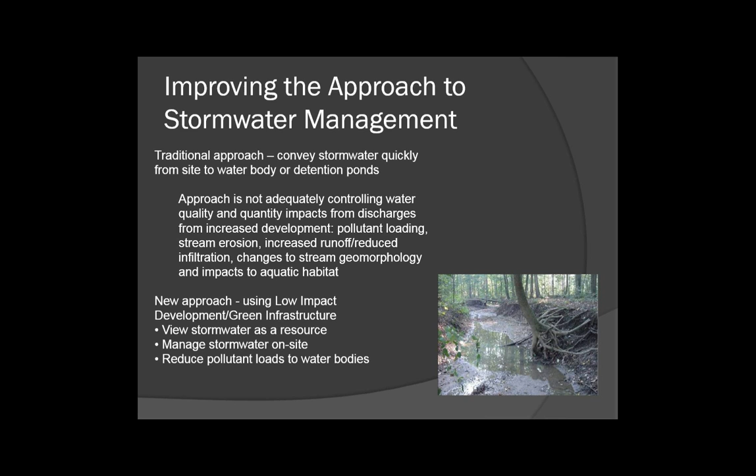It can change the geomorphology of a stream. It affects the habitat for fish and wildlife. Using low-impact development or green infrastructure is changing the paradigm. It's viewing stormwater as a resource, managing stormwater on site to the extent that it's practical, and reducing pollutant loads to water bodies.

Low-impact development is a comprehensive land planning approach, and it's trying to basically look at the pre-development hydrologic regime and mimic that. And in doing that, it can sustain and restore ecological functions. And it can be applied to new development, redevelopment, or retrofits. It's typically less expensive and easier to do if you do it up front more holistically rather than doing a retrofit later.

The picture that you see on this particular slide is actually Northfield Stapleton in Denver. Stapleton is the old airport. I actually live there. This is a particular area that is used as a regional stormwater facility right off of Interstate 70. In addition to capturing stormwater for a very large shopping center that has a Super Target and a Bass Pro Shop and a number of other things, it also serves as wildlife habitat and a great open area.

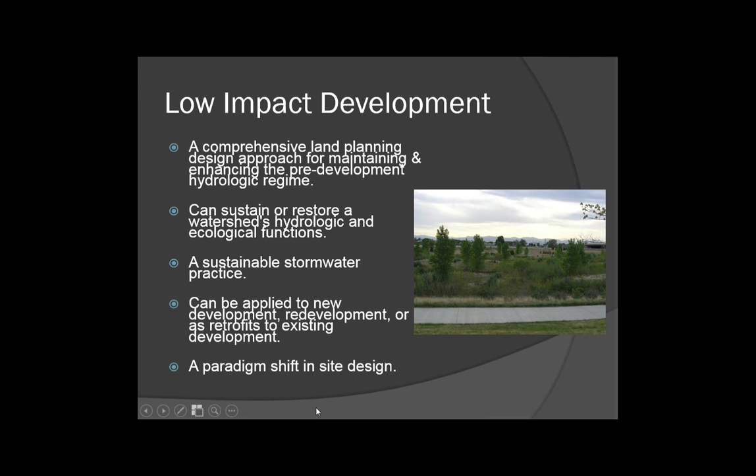Green infrastructure can be done in a lot of different scales. In large scales, it can be forests, and it's very important to protect those for drinking water supplies in headwaters areas. It can be in rural areas in terms of riparian areas or wetlands, and then it can be ultra-urban areas where you're doing green streets, planter boxes, and other things.

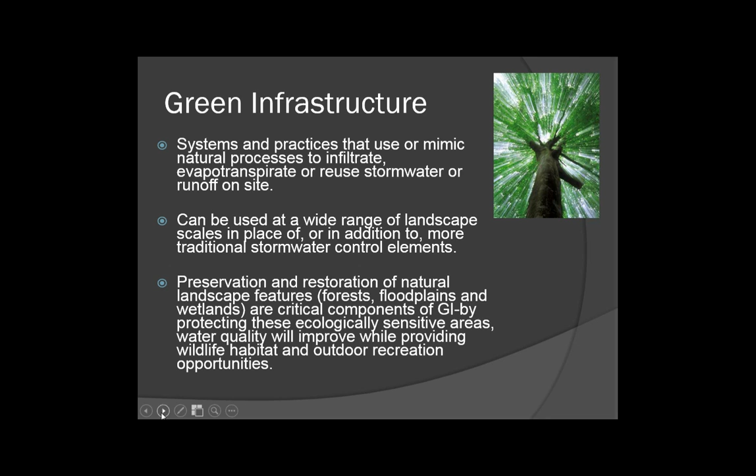But it's very important in terms of protecting water quality, protecting ecologically sensitive areas, and providing opportunities for people to recreate and enjoy the outdoors. Basically, we're trying to take the water and slow it down, spread it out, and soak it in.

Green infrastructure can be integrated into parks and open space and urban forestry, and a lot of parking lot requirements. Typically, a lot of communities have parking lot landscaping requirements, so it can be integrated in that way. It's a great climate adaptation strategy. It's great for smart growth, sustainability, resilience, sort of depending on what words you want to use to characterize that. It's also great for flood restoration, which we've seen a lot of in Colorado.

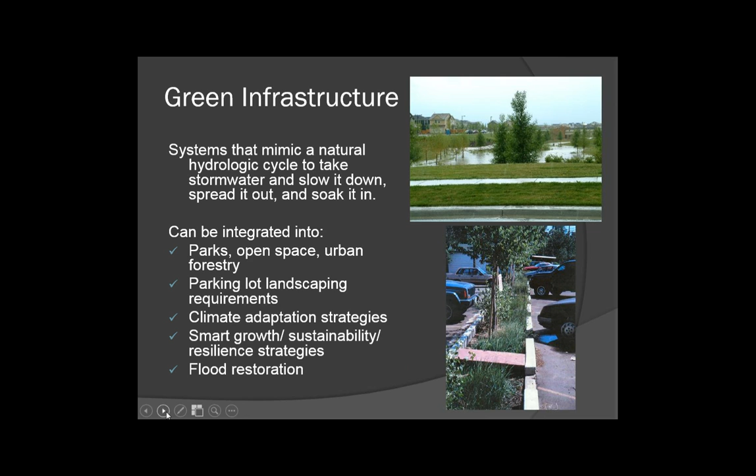A lot of different types of green infrastructure. Some of these are sort of overlapping. Green roofs, planter boxes, rain gardens, bioswales or bioretention cells, which are vegetated swales, tree trenches. The rain gardens, bioswales, vegetated swales, tree trenches are all kind of similar. It's sort of more the scale and the type of vegetation that you use in them.

Ponds, some folks consider those green infrastructure and some don't. It can depend a lot on how they're designed and what their function is for. Porous pavements, which can include porous asphalt, porous concrete, or permeable pavers. Green streets, complete streets, wetlands and riparian areas, and rainwater harvesting.

Colorado doesn't allow rainwater harvesting in very many circumstances. All of our states are a little bit different, but with prior appropriation, it can vary from state to state. Colorado is probably the most strict one in our region, and most people are not supposed to have rain barrels in Colorado unless you're not hooked up to a municipal water supply system.

The picture that you see on the upper right of your slide is actually a green roof on top of the Mormon Conference Center in Salt Lake City, Utah. And the picture that you see down on the lower right is actually a bioswale at Fort Carson in Colorado.

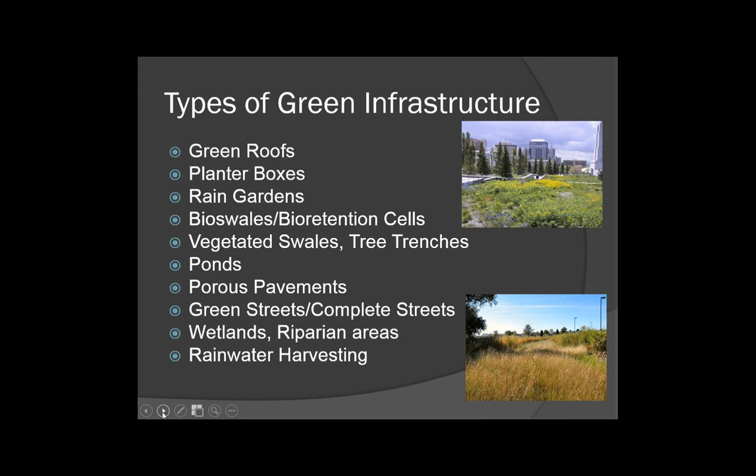The value of green infrastructure includes stormwater management, climate adaptation, urban heat island reduction, biodiversity and attraction of wildlife, air quality improvements, clean water, healthy soils, recreation, and quality of life.

The picture that you see on the upper right of your screen is actually a development in the River North area of Denver, Colorado. It's a development called Taxi, which was a former yellow cab facility that had some contamination issues that were cleaned up, and it is now a mixed-use development that has office space, residential space, and commercial space. And they were able to do a lot of really beautiful green infrastructure that meets their stormwater requirements, but it also provides a really great outdoor space for the people that live there.

And the picture on the bottom right is another bioswale at Fort Carson, Colorado. This one has irises in it. It's very attractive.

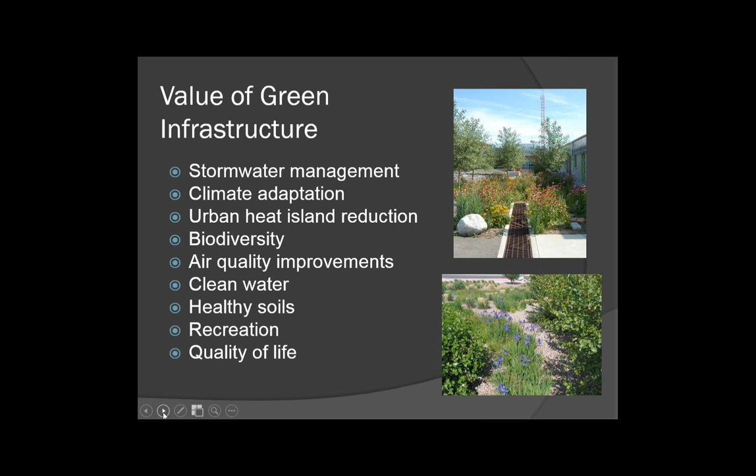There's a lot of additional benefits to green infrastructure, including delaying stormwater runoff volumes, enhancing groundwater recharge, reducing pollutant loads, reducing sewer overflow events. This isn't very typical in our particular region, as we only have actually one combined sewer overflow in our six-state region, but it's very common, particularly east of the Mississippi.

Increased carbon sequestration, additional wildlife habitat and recreational space, improved human health, increased land values. There have been a number of studies that have showed decreases in crime by having more green infrastructure. There's a lot less splash and spray, ponding, noise, and pollutants that come off of permeable pavements.

It can be less expensive than gray infrastructure, particularly in the long term, and if you look at all the additional benefits that occur from it. It's much more aesthetically pleasing, and it makes communities much more resilient, particularly in drought or in flooding events.

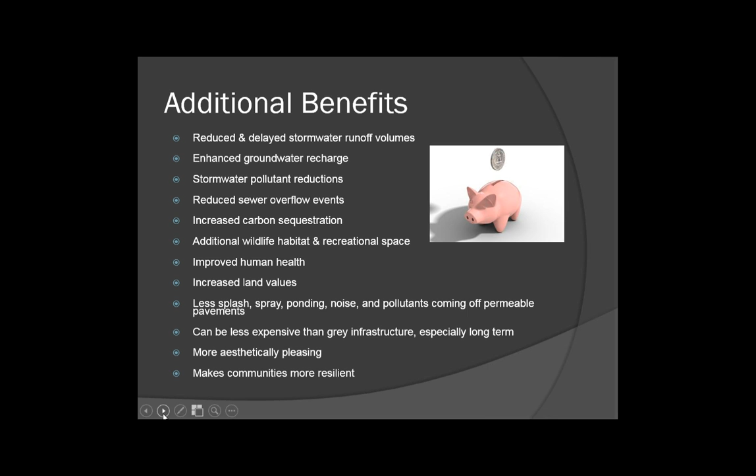A lot of discussion around cost of green infrastructure versus gray infrastructure. I put just a couple things on here. There's quite a few words. The picture that you see at the bottom is actually a Denver Housing Authority affordable housing complex in Denver, Colorado. It's not too far from downtown. They were able to save a really significant amount of money by not building a stormwater vault.

In ultra-urban areas, a lot of times because of the density, stormwater vaults are put under buildings. They can typically cost up to around $1 million, which is pretty expensive. So Denver Housing Authority would have had to put in an $850,000 stormwater vault, and for $350,000 they were able to put in bioswales and permeable pavements.

At EPA's building, actually, we were able to decrease the size of the stormwater vault under the building because of the green roof that we put on top of our building. And Denver Housing Authority, at one of their other developments, at the Mariposa site near a light rail station, they actually are going to save $3 million by using green infrastructure over traditional gray infrastructure. And this is a site that actually had a lot of stormwater issues in heavy storm events because the infrastructure was quite outdated.

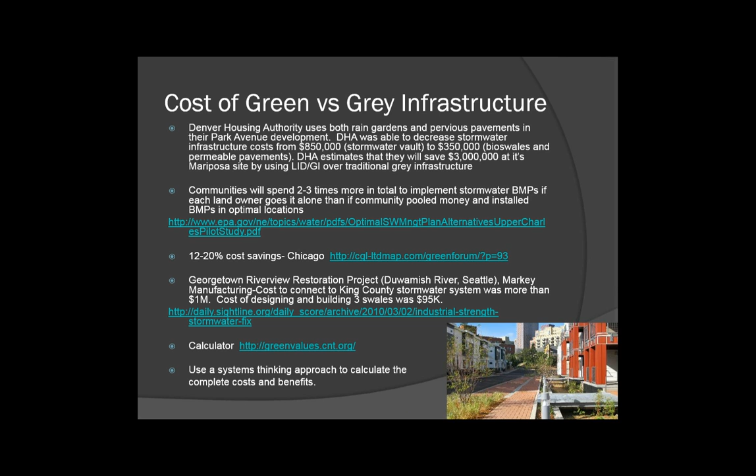Green infrastructure in the semi-arid West is quite different than in other parts of the country, as I previously mentioned. In Denver, we get about 15 inches of precipitation per year, about 300 days of sunshine, infrequent but intense storms that can dump a lot of water at one time. We have a lot of low water native plants. So green infrastructure here, we've had some folks refer to it as taupe infrastructure or brown infrastructure because it really looks quite a bit different than it would if you lived on one of the coasts.

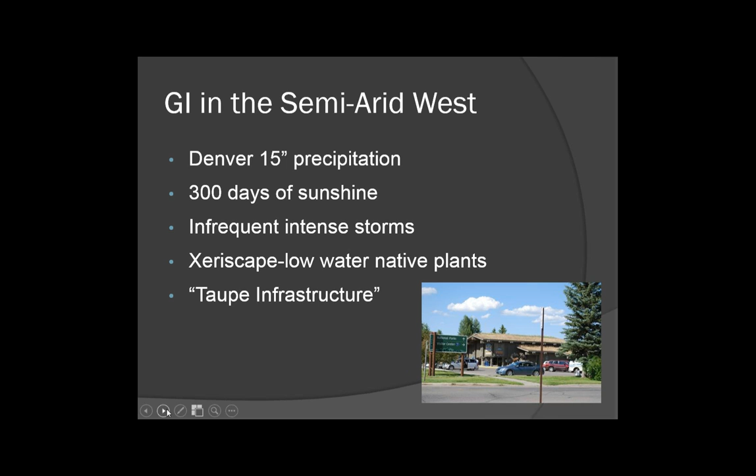And the picture that you see there to your lower right is actually a sod roof in Jackson, Wyoming. They're quite common actually in Norway. They used to be quite common in the United States, not so much recently, but they're making a comeback. As I mentioned earlier, we hardly have any combined sewer overflows here, so green infrastructure looks a little bit different.

Prior appropriation can change who owns the water and what you're allowed to do with it, depending on which state you live in. Clay soils can make it difficult to infiltrate water. And so design and engineering for infiltration can be really important, and it can be very site-specific depending on the types of soils and what sorts of surrounding things that you have going on there.

And the picture you see to your lower right is actually the Museum of Contemporary Art in downtown Denver. And this is their green roof open space, and so it infiltrates stormwater, and it's also green infrastructure as art.

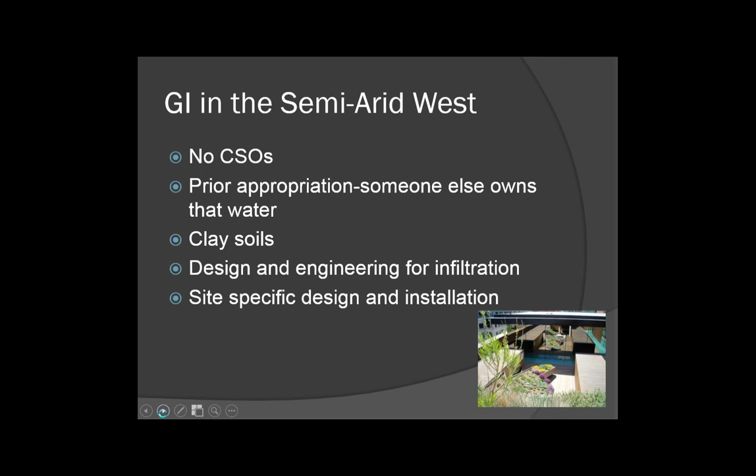Some of the barriers to green infrastructure in the West can include perceived design, construction, and maintenance costs. It's very different maintaining green infrastructure than it is maintaining gray infrastructure. They both require maintenance, but it's a very different type of maintenance. A lot of different governmental agencies and departments.

In some places, the Parks Department is more responsible for maintaining green infrastructure, but the Public Works Department is the one that has the funding and that focuses on the stormwater piece. So a lot of times it can require a lot of coordination between different agencies and departments.

There can be a lot of misperceptions on the economics. A lot of people say it's more expensive. I think there's a lot of materials out there and it can depend a lot on the individual circumstances on what the costs are. But in the long run, and when you consider all of the different items that go into it and the different benefits, it actually can be less expensive.

A lot of green infrastructure is not integrated into regional and site planning. It's a lot easier to do things on the front end than it is to try to do it on the back end. And then it's always really hard just trying to get people to do things in a new or different way than the way that they've done them in the past.

The picture that you see on the right is actually Stapleton in Denver again. This is a median that runs down 29th Avenue. It's fairly wide. It has a lot of green infrastructure. It also has running paths on it, and it's very popular for some of the runners and for people walking baby strollers and that sort of thing.

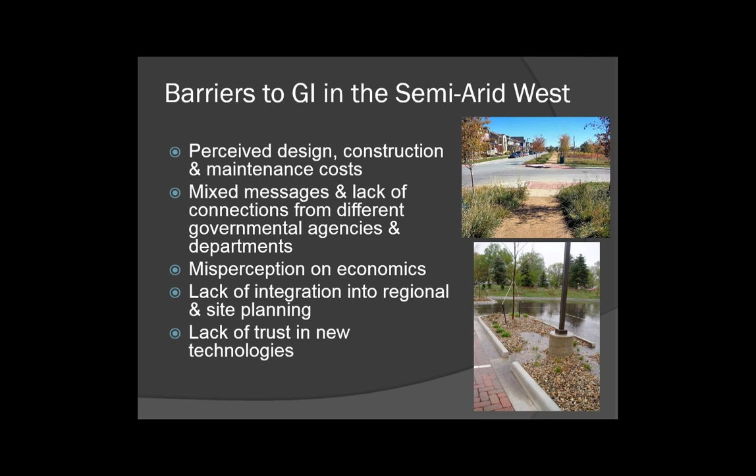Some different funding sources for green infrastructure. These are some possible ones. There aren't enormous ones. A lot of EPA's funding is geared more towards design of green infrastructure rather than implementation. Typically our funding can't be used for anything that's required under a municipal storm sewer permit. There's sort of some ways to look at that and to fund some ancillary sorts of things.

But Section 319 non-point source pollution grants that the states give out can be used for green infrastructure. It typically is used a lot in stream restorations, but it can be used for a lot of other things instead. The Clean Water State Revolving Loan Funds, we haven't had a lot of that used in Region 8.

I think there was one project in South Dakota, but typically the states have a 10% green reserve, and green infrastructure falls under the green reserve. Our states have typically used a lot of it for pump efficiency projects, but you can fund green infrastructure under that. And the revolving loan funds can also give out sub-grants in addition to loans.

Urban Water Small Grants, that's something new that came out a couple years ago, and that can actually be used for a lot of design and community sorts of projects. Green Infrastructure Technical Assistance through EPA's headquarters office. We are funding a project right now. We've had a couple projects in Denver. Would love to get a lot of projects applying for this from some of our other cities.

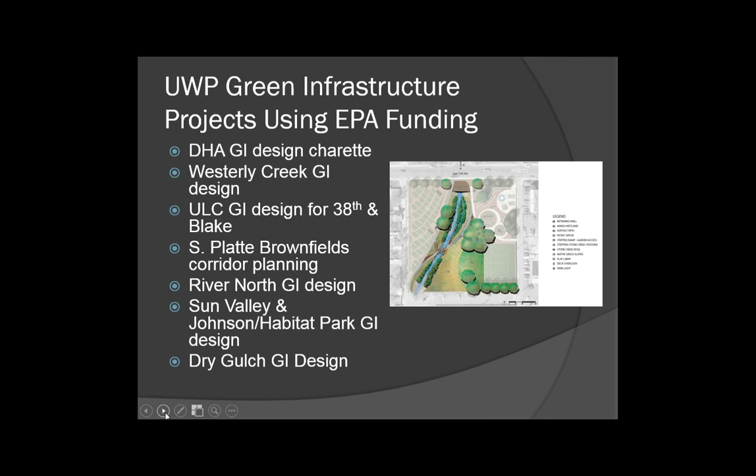We've done some green infrastructure charrettes, and we've had a number of lessons learned that came out of these. We've actually done them for a lot of affordable housing developments, but it's really helpful to look beyond project boundaries to get a more comprehensive approach. It's really helpful to identify all the stakeholders in the stormwater planning on the front end. There's a lot of trade-offs that occur between water quantity and water quality solutions. It's helpful to look at the goals and metrics before you go in.

Very helpful to collaborate with all the different city departments to make sure that all of the needs are met. Really innovative solutions may require a little bit of research and testing, and city policies may actually limit some of the things that can go in.

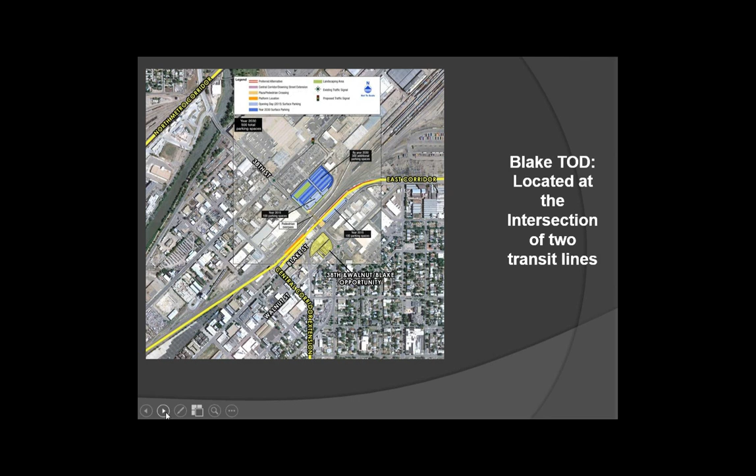This was actually a project that we did for the Urban Land Conservancy at a development that's going to be going in near a new light rail station. And this is through our Green Infrastructure Technical Assistance and our contractors, Tetra Tech. This shows you the site. It was very industrial, very urban. It has a new light rail station that's going to be opening early 2016. Urban Land Conservancy owns part of the site.

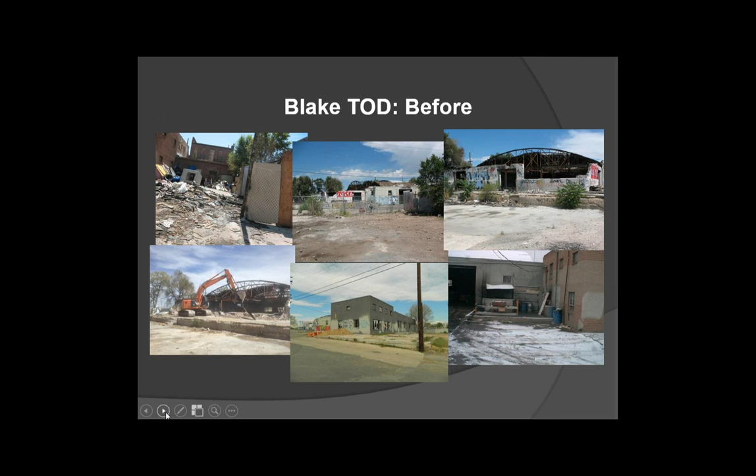This is sort of what it looked like before. It was pretty nasty. It had some minor contamination issues, but largely a lot of trash and a large homeless population living in the building. And we had a design charrette in conjunction with Housing Colorado. A lot of students, in addition to 2 architects and a lot of city folks came in, actually did a design that encompassed some other adjacent sites that were owned by some other folks, but they were able to come up with a site that infiltrated the stormwater from over a 100-year storm event, and to do it without any ponds. And they were able to do that through permeable pavements, green roofs, and landscaping.

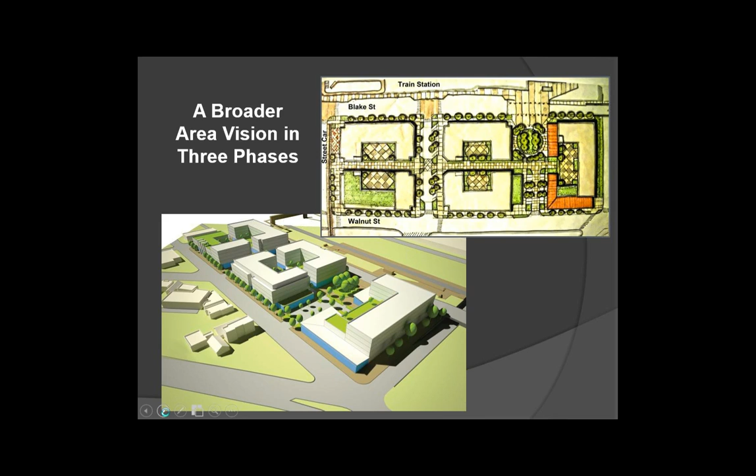And just sort of basically analyzing the site and then looking at the possibilities. And it's much easier to integrate it on the front end. Typically buildings get designed and then people think about what they're going to do for the stormwater at the back end, and they're like, oh yeah, we have to do that, and then it becomes a lot more difficult. It's a lot easier if you do it in the very beginning.

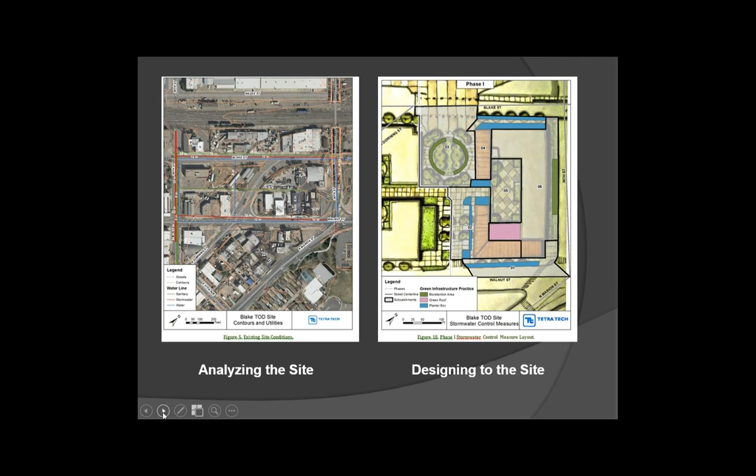Our contractor Tetra Tech provided a number of toolbox examples. This shows you some different pictures of bioswales, green roofs, and permeable pavers, some boxes that look at runoff from roofs, and then some underground detention.

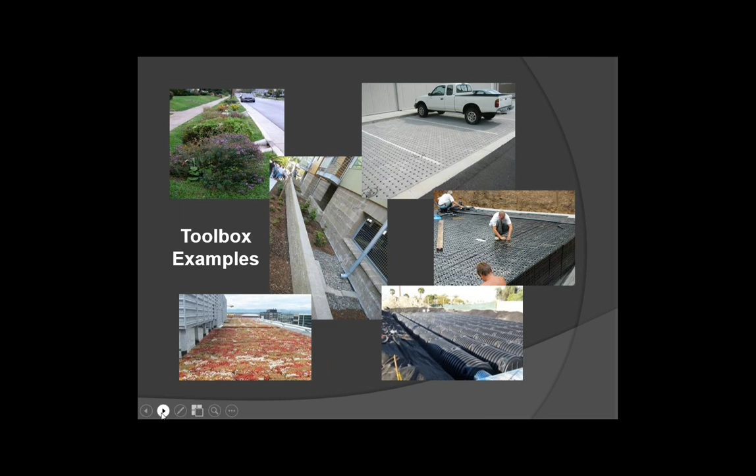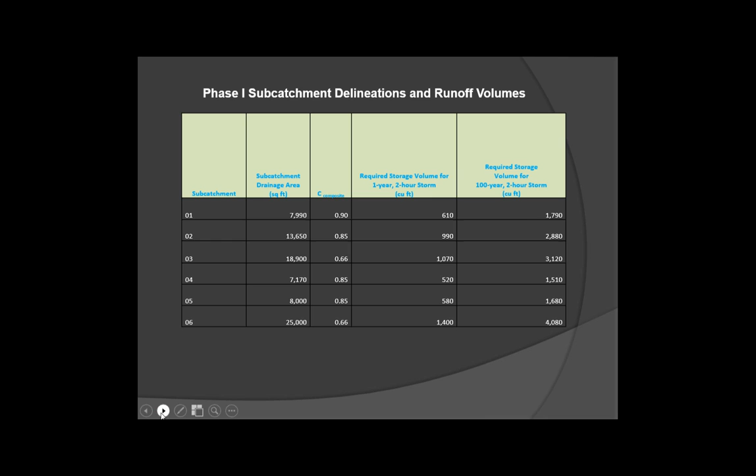I'm not going to go into this in detail. This is actually just looking at some of the engineering that was required in order to determine how much runoff you needed to deal with for the different designs. A lot more engineering mumbo-jumbo here, looking at different types of green infrastructure practices and sort of the surface areas and how much water they can infiltrate.

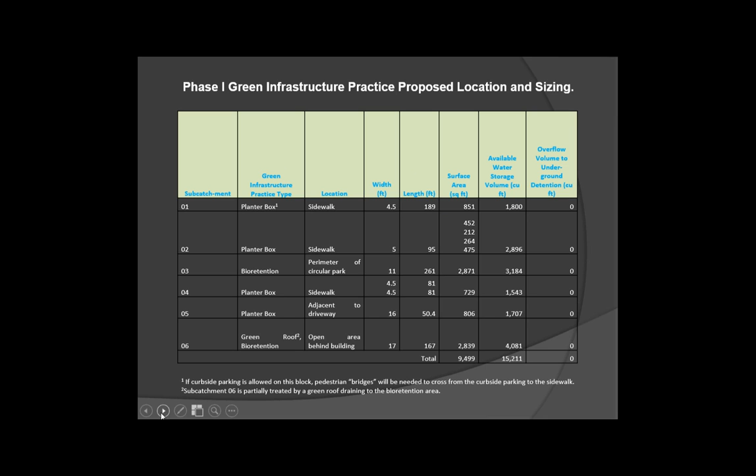Lots of O&M considerations for green infrastructure, including monitoring infiltration and drainage, possible pruning and mowing, mulching, watering and fertilizing, removing and replacing dead plants, looking at inlets and outlets and underdrains if those are part of the design. And all of this is usually done on different frequencies.

And the picture that you see there to the right is actually Stapleton. Again, this is Greenway Park. It's actually in the fall. This particular installation required 3 years of irrigation to establish all of the vegetation that you see there. And that's pretty typical, 3 to 4 years of irrigation in a dry climate before the plants get established.

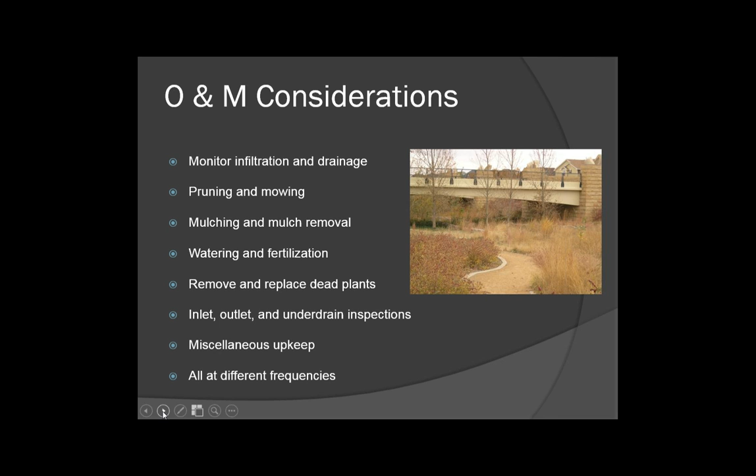Some more lessons learned from the particular design charrette that we did with the Urban Land Conservancy. Oh, in case folks don't know what a charrette is, it's a design workshop where you bring a lot of people together, sort of a fancy term used for that. A lot of these are really similar to what we had from the other design charrette, so I won't go into that. And that's it.